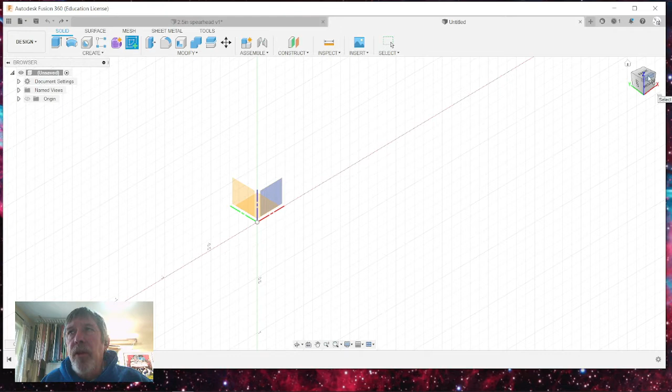So we've got the X and the Y and the Z, Y being in the positive, X being in the positive. Normally when you first start a sketch, it asks you what plane do you want the sketch to be on, and this is the look that you get. I'm going to select this plane, and it's going to flatten it out for me.

And I want to start with a line that's a construction line. I don't want to draw just a straight line, and the difference between the two is that I can draw a line like that, and that's a regular line. I can use the L key for line, or I can select construction and draw a line like this.

So both of these lines are, one's what would be considered a solid line and one's a construction line. The construction line helps for when you're creating a profile or a design where you don't want to get any confusion about getting that selected into creating whatever it is that you're going to be doing on the machine.

I'm going to delete these two. So I do want a line, and I'm going to hit the construction tool, which I've already done, and I want to lock this into this plane right here. I want this to be on the X0, and I want it to be 2.5 inches long.

So you can just start drawing it out, and as long as you're not at an angle, it'll snap to. If you have questions about snaps or anything like that, let me know. But I don't want it at any degree, and I want it 2.5 inches long. I'm just going to type that in and hit OK.

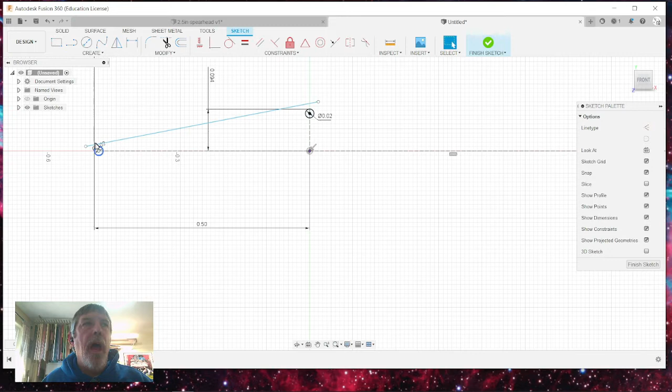So now I'm just going to create a regular line, not a spline. And I'm going to draw the line a little bit longer than what I need, and just leave it out there in space. I do want to move my dimension tool out of the way.

So now I've got this line, but I need to create a tangent, and this is your tangent tool. Since this is already fixed, I can select this and then select this line, and it brings it down so that it's matching. It's actually the exact point where it rotates on there - it's called the line of tangency. If you play a lot of pool, you'll know what I'm talking about. I'm going to hit escape so you can see what I'm talking about.

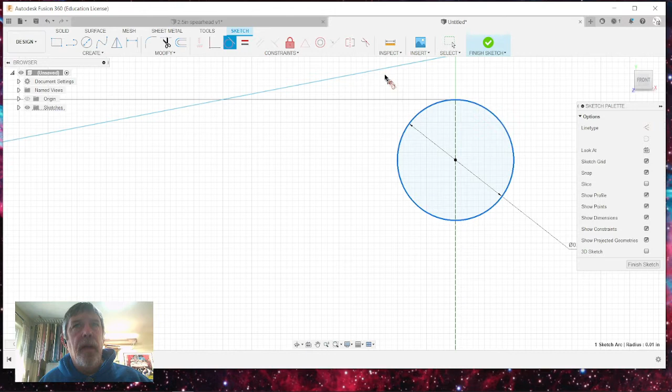Because if I grab this and rotate it, it stays tangent to that line. But I need to lock it into the tangent point of this one too. So I'm going to escape, select my tangent tool, select this line, and select this. Now I've got my two points of tangency, and this line is fixed now also.

Now I need to trim this. I want to trim this edge away, and I want to trim this edge away for right now. I'm going to leave that other edge there for just a minute. Over here, I want to trim away this edge, and this edge, and this bottom half of this, because we only need half of the profile.

I'm going to create another line that is going to be longer than this by a little ways, and I'm going to make it tangent to this edge. I'll leave my tangent tool open. I'm going to select this one and select my tangent there.

And I select my trim tool now, and this is such a small little teeny curve, but it does make a difference. I mean, you could make this sharp, but as far as doing machining goes, I like accuracy. I'm going to trim off - this dimension here is all that there is for that.

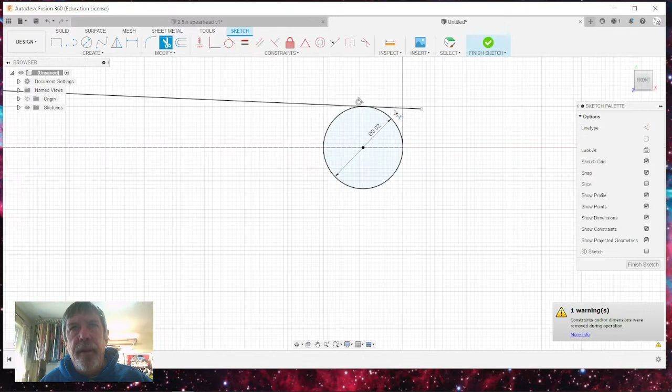I'm going to trim off this edge, so it doesn't show up in anything once we get this done. And over here I'm going to do the trimming of this end and this side and this half. So now I have my half of my profile to make my spearhead look exactly like this one.

I'm going to go back to this, and now I'm going to use the mirror tool again. Now, I suggest, and it's just my suggestion, you can do whatever you want, but there's multiple ways of selecting things when you're using tools in any CAD program. So whether you're using BobCAD or Mastercam or SolidWorks or Fusion 360 or even VCarve Pro or anything like that, there's usually a couple different ways.

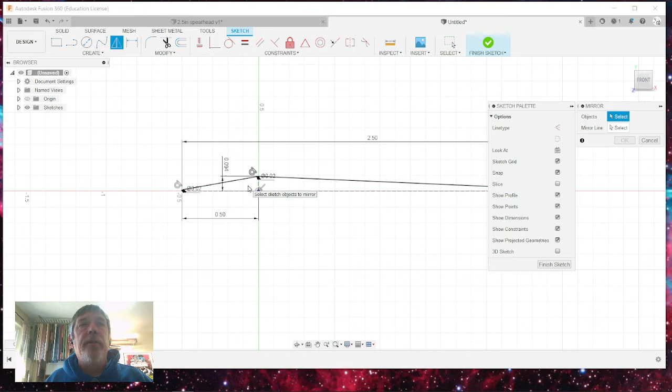One of the rules is that if you click somewhere and draw a box and drag it through the area, it will only include what's inside the box. Notice that it didn't select this line or this line. It only selected that little teeny curve right there. That's all it selected, was that little teeny curve.

The other way - I'm going to unselect that, escape - is that if you draw a box from right to left and drag this down, this is what's called an inclusive box, and it's everything that it's touching. So it grabbed this line and that little curve, but it also grabbed this line, and you don't want that line. So in this case, it's a lot easier if you do the third method and just select all of the lines that you want to use.

And you do this by holding the Shift key down. We're going to go back to the mirror tool and select mirror, and it says, what are the objects you want to create a mirror of? I want this one. I want this one.

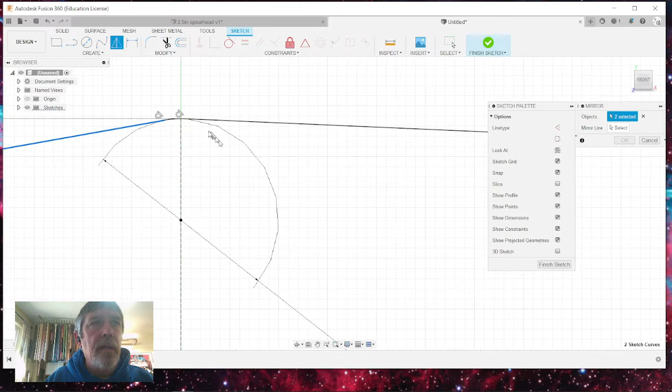I want this little teeny one right here. Make sure you select everything. I'm just using my mouse wheel to roll in and out of this. And I want this one.

Now I want to mirror them on this line right here. So select your mirror line option and then select the line, and it creates the mirror. Click OK. So now I've got a solid image.

In Fusion 360, if you've made a mistake in your drawing and when you mirror something, they're not exact. If you don't get this shadowing when you hover over it, or it doesn't look like it's two-tone like it does now, it's just light blue versus this white, then there's an open vector here. You've got a mistake somewhere in what you've created.

So you want to make sure that you're precise with that. So now I've created that center spearhead. But I need a rectangular box around it because I want to be able to create the inlay and create the pocket. So let's go back to this.

The easiest way to create a box around here that's nice and simple is you can do it different ways. You can draw a box like this. You can just grab somewhere and make the box bigger, and hit enter. The problem with this is that this box is mobile, it can be moved around and shifted in size.

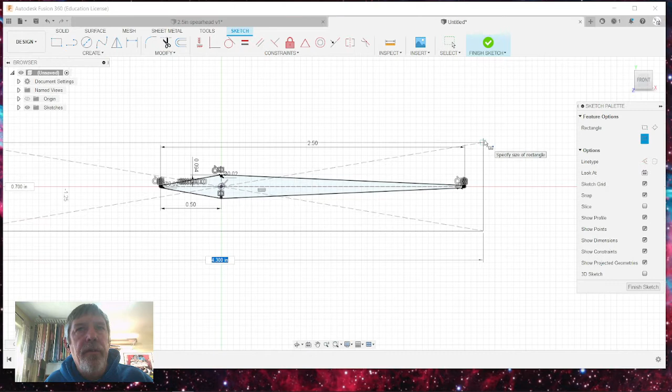Under the create menu, if you go to rectangle, there's a center rectangle tool, and I can simply click on the very center of this and draw this out, however big, and hit escape, and then put in my two dimensions. I can dimension this...

And I can dimension this. And now I've got this here. Problem with this way of doing it is that my little inlay is way off of the middle, and I don't like doing that. So I'm going to escape, I don't want to do that. Delete that, and delete that.

Here's another way of doing this. I'm going to lock onto the center line. I'm going to draw it up high enough so that it's past where I need it. I'm going to click, draw over, and draw it down.

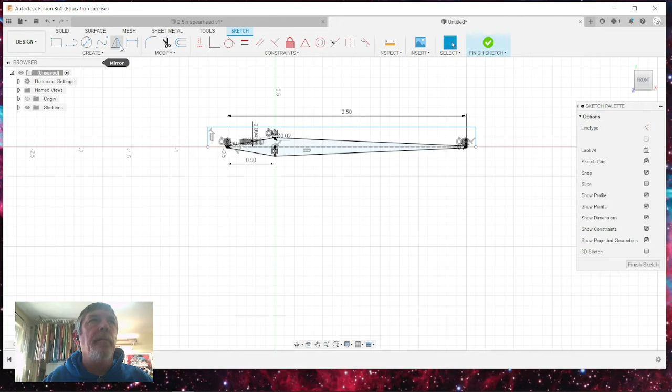I'll lock onto this line. And now I've created half of a box. And I can mirror that, using my mirror line.

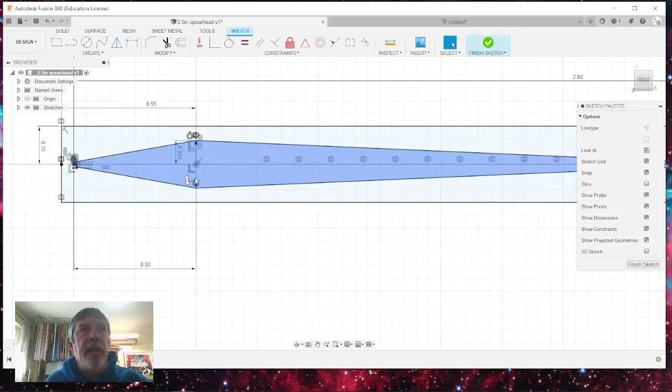So ways of skinning cats, whichever way you want to do it, doesn't really matter. So I've got my box, and though it's not exactly the same size as this one on the outside, it doesn't matter as long as the inside box is.

So now that I've got that, I need to create my solids. And when you're machining, the inlay needs to be a couple thousandths of an inch smaller, and there's a couple ways of doing this too. I'm going to show you the way that I like to do it.

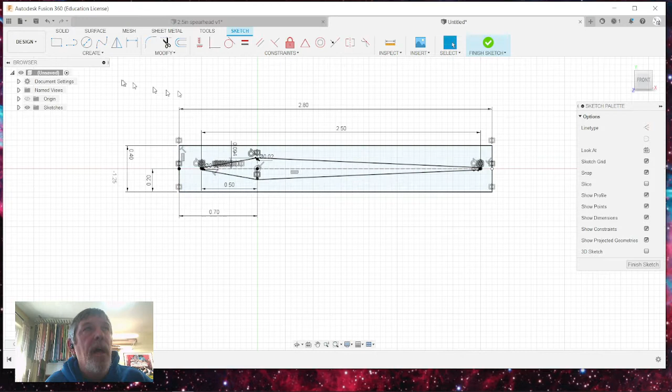I'm going to create a solid and select extrude, and this is a new body, and I'm just going to select this outer one. Because my origin, this is the flat plane, the 0 and the Z, I actually want to go down, and the thickness of the material that I'm cutting is 0.065, and so that's the maximum that I want to go with the depth of my extrusion. I don't want my pocket going any deeper than the material.

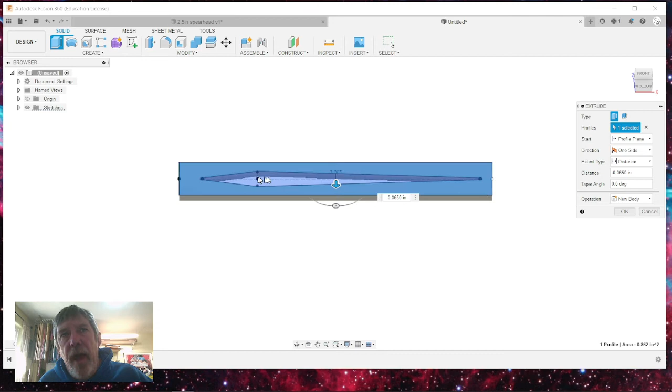And even though the curve of the radius of the cue itself will allow me to go to the outside edge, this is absolutely the deepest point of the cue, and I don't want it going any deeper than that. Glue notwithstanding or anything like that, I don't need the material going in any deeper. I don't want to take any more off the cue than I have to. So I've got it as a minus 0.065, and you can hit enter or click OK.

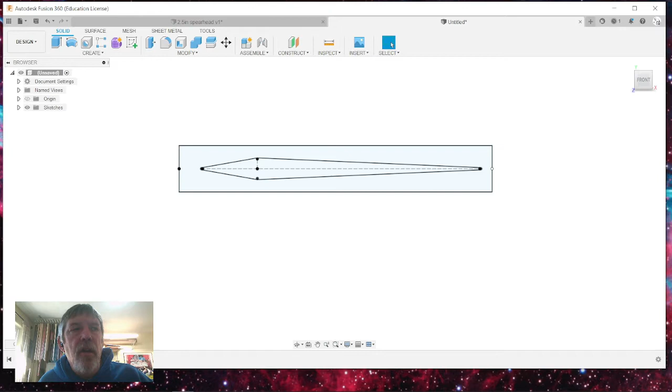Notice that I don't see my sketch anymore, because it's thinking, oh, you're all done with your sketch. Well, the sketch is down here, and this is the tool, and I can actually move this back so I don't mess with that. And the sketch, I need to go back and edit it. So right click on it and select Edit Sketch, and now I need to create another solid body, and I'm going to select this one.

And when I do, I selected the body, but I didn't create what I wanted. It's going to be called a new body too. You can do cuts or whatever. If you select on this, it'll tell you to join them, but I don't want them to join. I just want a new body. And this one also needs to be 0.065. And I'm going to go the same direction. Backspace 0.065 and hit enter.

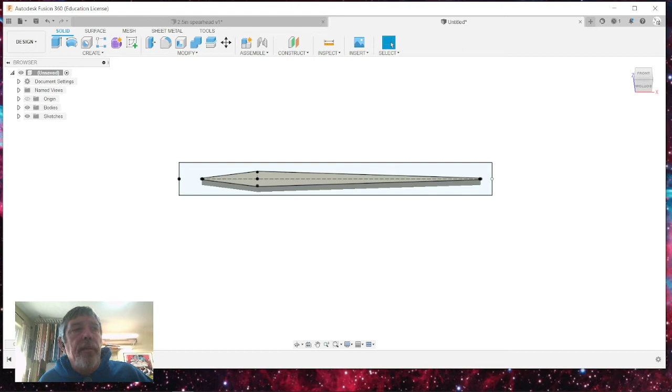And notice that it doesn't show the other body. I'm going to grab this and move it back over here. And so now I've got my two bodies. They are exactly the same size. And the only problem with this is that because there's always flex in bits, if I cut out this inlay and cut out this pocket, the inlay is going to be too tight. It's not going to fit in there. You have to try to pound it down in, and even though it might look like it's perfect, it is a little too difficult to do.

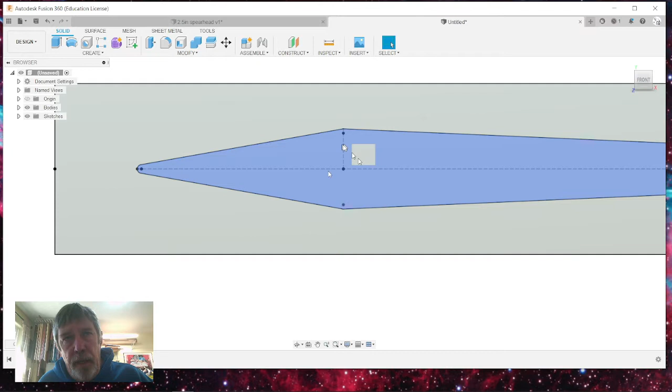And you have to decide according to the accuracy of your CNC machine and the bits that you're using and the speed you're running them at, how much offset you want to give on your space. Remember, there's just a slight little curve right there. It's just really small, but it is there and it shows up. So once you've done this, I need to make a decision. Do I want my inlay to be a little bit smaller, or do I want my pocket to be a little bit larger?

Since I'm using a bit that is 0.01975, I can actually know that the bit will fit down in these 0.02 radius corners without any issues. When it goes to machine them, it's not going to not fit there. So I'm okay with the pocket being the size that I have it. And so now I want to make my inlay a little bit smaller. And this is how you do this.

I'm going to go over to bodies, and I've created two bodies. The first body, body 1, is this one. Or no, the first body was this one, and I want to hide it. So I'm just going to click off on the eye, and I've got that hidden. And notice I can see my sketch, and I don't really want to see the sketch because I'm afraid that I'm going to select it when I go to select things. So I'm going to click the eye off and hide the sketch. And so now I've got my body.

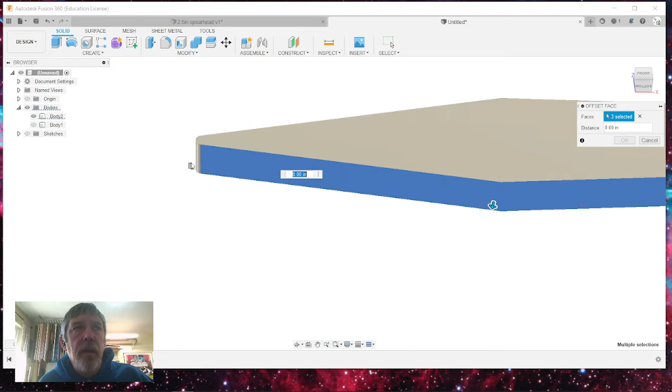And up here, I can modify this by going offset face. And you can select whatever faces you want, but I want to select all these little edges. And I want to make sure there's that little curve there, that I select that one and that one. And this one. And this one. And then I'm going to turn it around so that I can see these faces. And I need to select that one, and that one last little face.

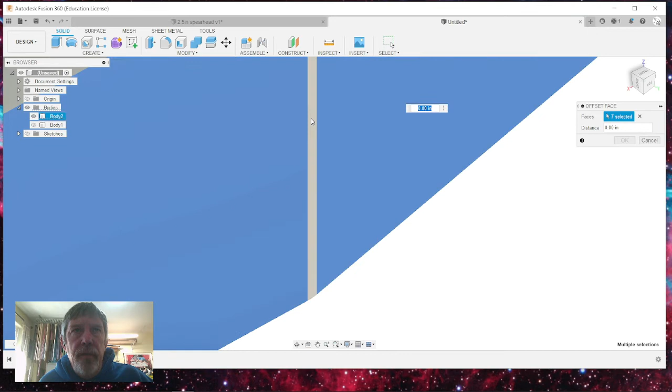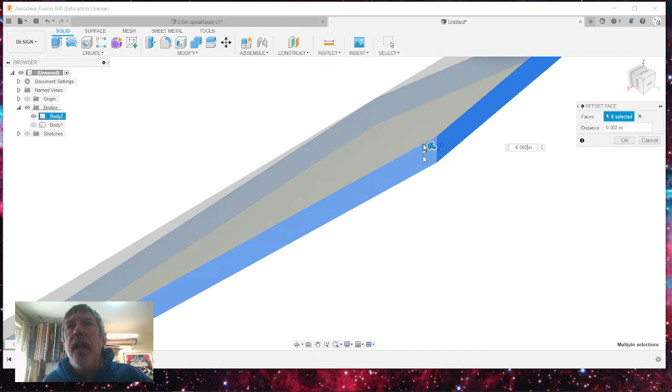And the arrow tells you which direction it's going. In this case, I'm just going to type in the minus sign, and I'm just going to reduce it by 0.002 of an inch. This made my inlay just 0.002 of an inch smaller. And I'm going to click OK. And we're going to check this to see the difference between these two. So let's turn this back around.

And turn my other body back on and see the difference. 0.002 of an inch. We can check that by going to inspect, and if I select this radius, it's going to tell me my radius is, or the diameter is 0.02, my radius is 0.01. I can select out of this thing and select this other radius, and it's going to tell me that the radius is 0.008, 0.002 of an inch smaller.

This might seem like a huge gap, and like I said, it's according to what your machine does and everything, but it's really not. When we're looking at 2.5 inches, so if you zoom way out of this, I'm still not anywhere down to where 2.5 inches is. It's almost negligible. You can't see it, but it does give you room to get your inlay to fit into your cue or your pocket or whatever you're creating. So I've got those two, and I'm going to close this now, and we're ready to create either the pocket or the inlay.

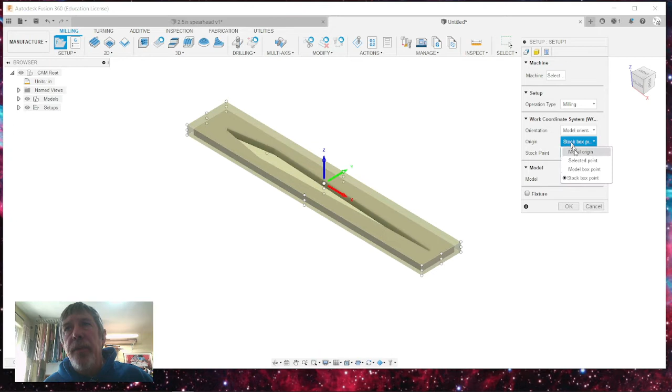Remember I said it didn't matter which plane you are on. This is my origin right here, and I can simply select model origin and it will be right there. That's where it's going to call 0, 0 when you create this point. You can select somewhere else if you want. Selected point, you can do the ends, you can do the corners, you can do the bottom corners, you can select wherever you want, and this is one of the things I was saying, it doesn't matter.

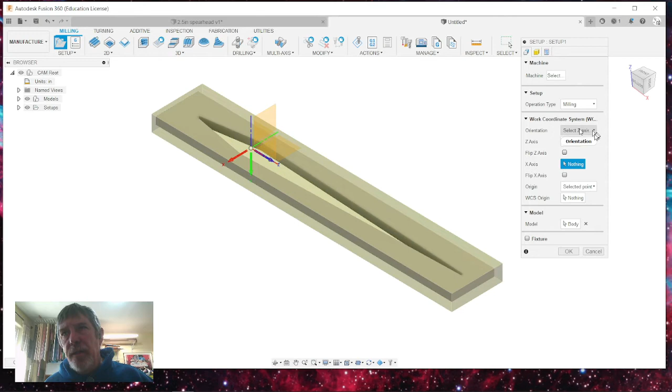That being said, you can also change where the Z is and which direction the Z is. So if say I want this to be Z, notice that now this is Z along this point. If you made your part on the wrong plane, you can change your work coordinate system in this area. I don't need to do that. I want to close this and go back to my model orientation, and I want to select my model origin.

Now this is saying that I've got stock material that defaults to 4/100 of an inch over on the side and 4/100 of an inch over on the top. This is if you're roughing materials, it's thinking that maybe you need to flatten the face out before you create the pocket, or you have a jig holding the material or something like that. In this case, it's on the cue, and the cue is mounted in the lathe on the CNC machine, and it doesn't need to be held by a jig or anything like that.

And I don't need any extra stock, so I'm going to put in 0 here. You can either highlight the number or highlight the whole thing and hit 0, it doesn't really matter. It's just going to take that extra stock away. And now you want to give it a name. We're going to call this a 2.5 inch by 0.1875 inch straight spearhead. And this is the pocket, so we're going to go pocket.

We're going to be doing 2 different operations to create this pocket. So I'm going to go pocket, step 1. And I'm going to be using that 0.0197 in mill. So I want to put this in here, 0.02 in mill.

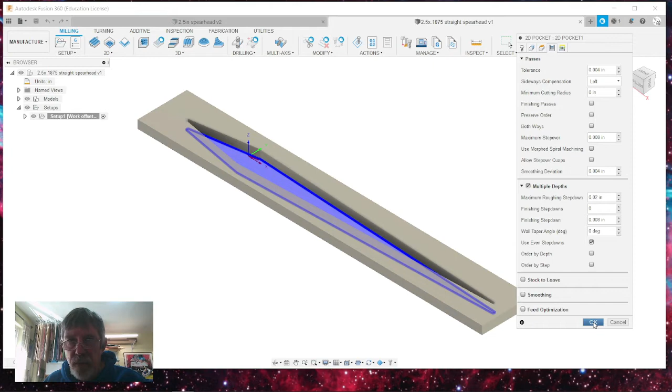This is why I suggest learning how to use two tools to do a pocket like this. So I'm going to click OK, and it's going to create all of your pockets. Notice that there's a helix here because it's going to helix down in. We're going to talk about that in a minute when we change this, but for right now, it doesn't matter. If I open up the simulation, you can create the pocket this way if you just want to let the machine sit there and run.

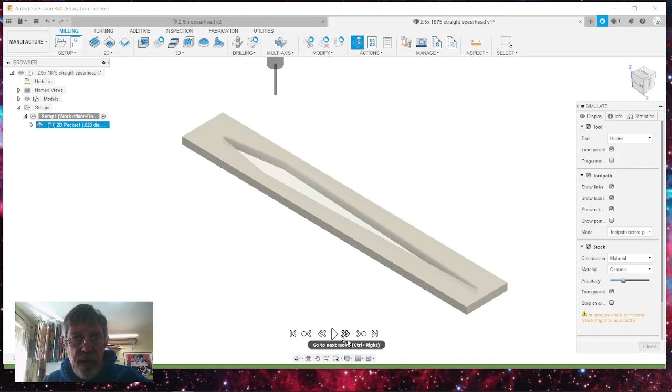I've got this running at full speed right now. I'm going to hit play, and let's slow that down a little bit more. I'm going to do it again. It's going to do a pocket all the way the full distance, one pass. Then it's going to go down and do the second one and the third one. Since it's stepping down 0.02, it's got to do at least 4, almost 5 step downs for the 0.065 depth in doing the pocket.

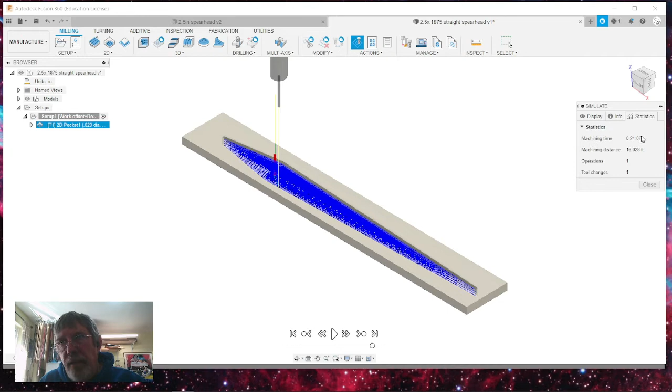When it all gets done, I'm just going to fast forward to the end of this, you can go to statistics and it shows this takes 24 minutes to cut. If you want to sit there and let your machine run for almost a half an hour, there's nothing wrong with that. It'll give you a clean cut. I do recommend a finish cut, but there's a much easier and much faster way to do this.

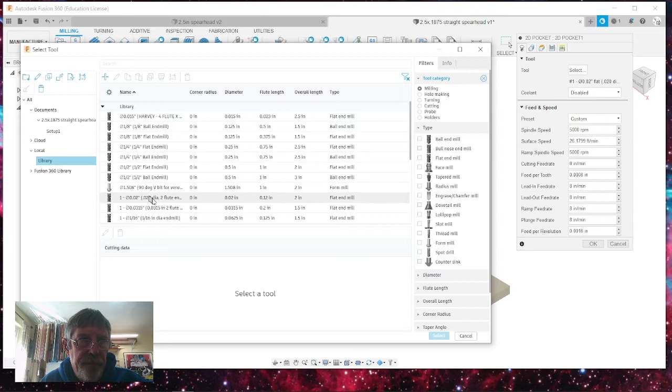So I'm going to close this, and I'm going to edit this pocket and change the tool to a 32nd of an inch end mill, 0.0315. Go to my library, select that one. This is not quite twice the diameter of the tool, but I can do a couple things here. I can change the passes. Notice that it's at 6.

Your cutting feed rate can be 8 on this. Different tools, as I've created them, I've done different things. The ramp can be 8 also, and the plunge can be 8, because we're plunging into wood, this isn't huge. Unless you're using a spindle motor, you don't have to worry about spindle speed. That's just an extra M code added to the G code, and it isn't necessary. So we've selected our tool and the geometry, and in passes, in this case, you can step down 0.04.

It's a little over the maximum amount of recommended step down, but you are doing wood and you're using a solid carbide bit, so I'm going to go 0.04. And my maximum step over can actually be, if I went half of 0.03 would be 0.015, and I'm fine with that too. So we're going to just stay, it's a little under a half, it's about 48% of the diameter of the bit. And under linking, down in this last one, we've got a Helix Entrance.

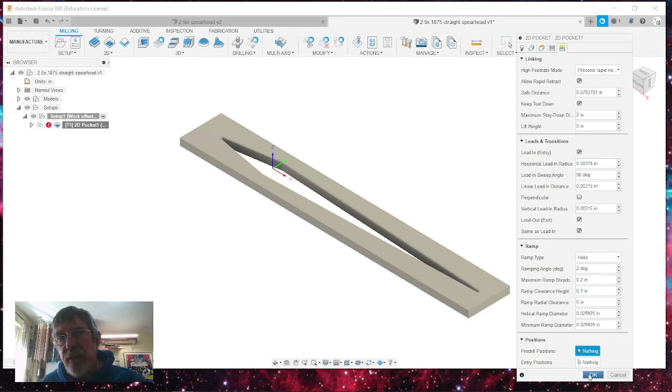I'm going to leave this and show you what happens with that ramp and some of the time that's wasted on that. So it doesn't matter about entry positions. It can just enter wherever. It's going to probably enter right in the middle. And we're going to click OK. So now we've got this, and haven't changed anything as far as the helix goes. We're going to hit play, and we're going to look at the statistics.

And we've cut the time down for cutting this whole pocket out down to 5 minutes. The problem that we have is that right here you can see it doesn't cut this end edge. Okay. So we're going to fix that. Let's do this first. This is the helix coming in. The material's 0.065, a little over 1/16 of an inch. It's coming down and spinning, thinking it's going through some material, and you don't want to break your bit. We spend good money on these bits, but you can cut this distance in half or more.

So since it's at a 0.1, right click on your pocket, edit, go to your linking, and down here under ramp clearance height, I'm going to change this to 0.025. This is a little over a 1/32, but as long as you start with good clearance, you're okay. So we've cut some time there. Did it save us any time? Let's find out. Statistics. Not quite a minute, it took about 35 seconds off of the time. So it's a little bit of time saving, but it is 35 seconds saved in your life.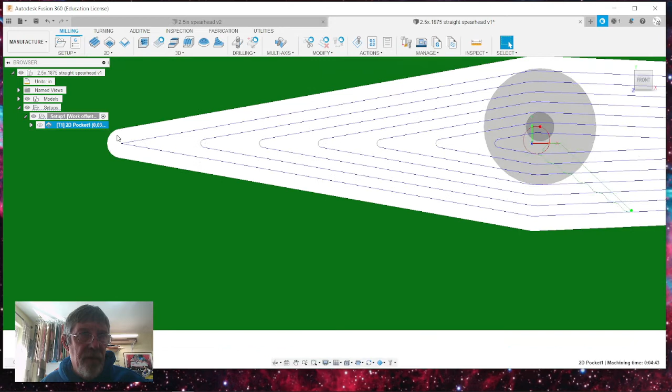And again, this bit doesn't fit down into the corner of that pocket. You can see where the actual pocket is. So we're missing material here, even though it cuts on this side. So let's go back and figure out what to do so that we can actually cut the whole pocket. And this is a good way of doing pockets. We need to create a different setup. Since I don't have a tool changer on my CNC machine, if you do, you can probably do it all in one, but I do need to create another setup.

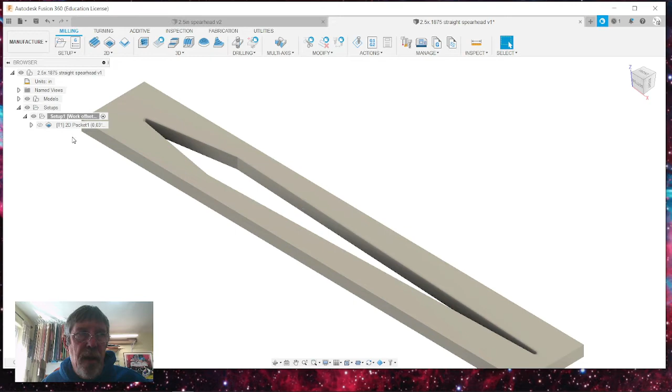So I'm going to do setup, new setup. It's going to default to the original, and we're just going to do model origin. The stock material is the same, from the preceding setup. And we're going to call this the 2.5 inch by 0.1875 straight spearhead pocket outline. Step 1.

Might seem redundant or too long. You can certainly come up with whatever way you want to name them. But when I do this stuff, I have so many pockets and inlays, I need to be able to recognize it from just looking at the title on this G code. And this one is going to be using the 0.02 end mill. I'm going to click OK. So I've got my second setup here. This one's going to be a 2D contour.

And the tool that I'm going to use is my 0.02. That's this one. Select. It did go back to all of its original settings, and I don't need it to be going that fast, so I really want it to cut at about 8 inches per minute, which doesn't seem like a lot until you actually are doing such a small cut as these, and 8 inches is moving pretty darn quick. And disabled, and we're going to select the geometry.

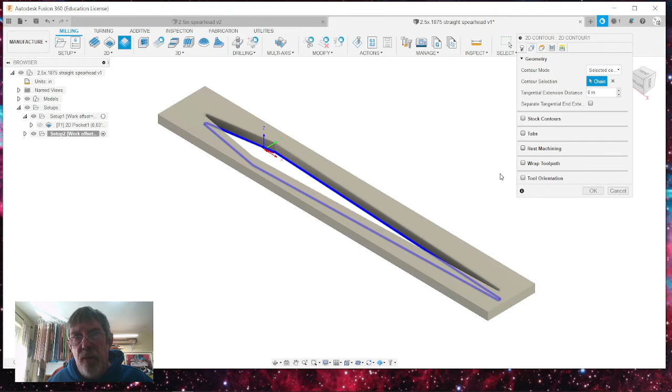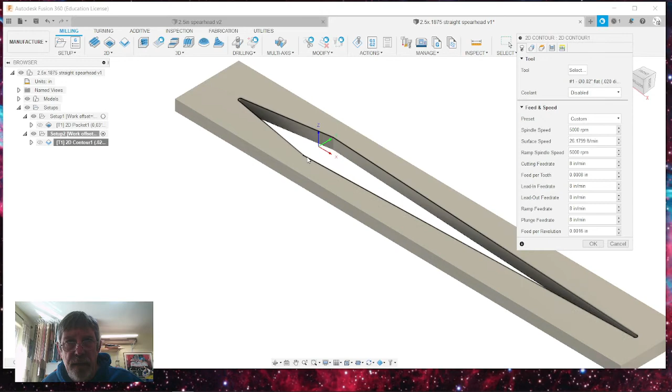And so if I did this as just one, it would just come down somewhere like here, and you can see where it has this lead in and lead out. One cut all the way around. Again, it'll break the bit, especially because we're using such a small bit. So go back into edit, and I don't want it to crash into that. I would rather have it ramp. So when we go to passes, I want to do multiple depths of 0.02.

So it's going to go down the depth of the radius or the diameter of the bit, make a pass, and then go down to the next depth. And under linking, I'm actually going to do a ramp. I'm going to turn off my lead in and lead out so that it just ramps down through the material. And if I left this at 2 degrees, it would come out, and here's my ramp step down maximum. I'm going to put in a 0 right there.

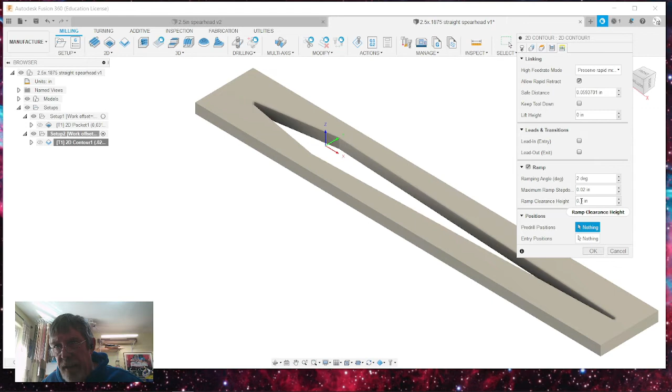Ramp clearance height again is 0.1. I'm going to click OK so you can see what's going on here. Again, it's going to sit there and do like 6 or 7 passes. 1, 2, 3, 4, 5, 6 before it even cuts into the material. Totally unnecessary. I'm going to edit that and go back to my linking and change my ramp stepdown to 0.025. And click OK. Now it's only going to go about 1.5 rotations around this before it actually starts cutting in.

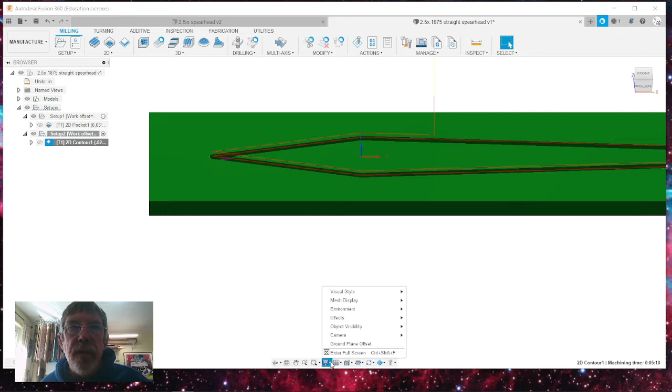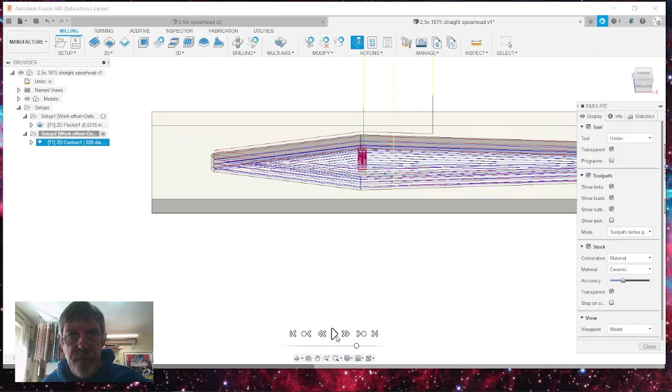And in Fusion 360, you can change the way that this looks simply by going down to your visual style. There's my visual style, grid, visual style, and keep it as wireframe. And now when I select that, and I select simulate, slow this down, play it again. Oh, it's on the first pocket. Sorry. Let's stop that. I'm going to do this one. Close. Let this one, simulate, and let's see what happens.

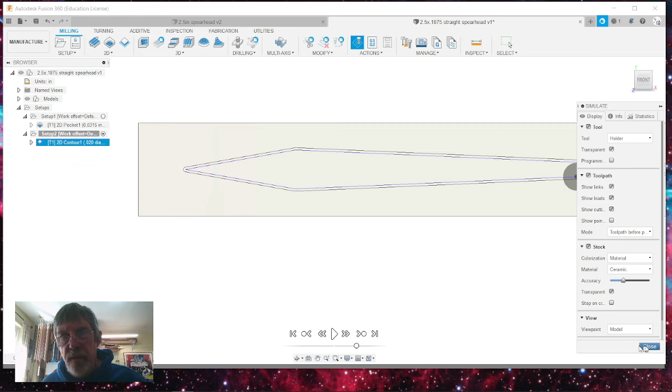So now we've got your first pass doing this outline, and the second pass, this one, should highlight. Close. Here's your 2 passes overlapping so that you can see what's going on. The first one's going to do the outline, and it'll actually make that whole cut and go all the way down there into the corner the way that it's supposed to in the material.

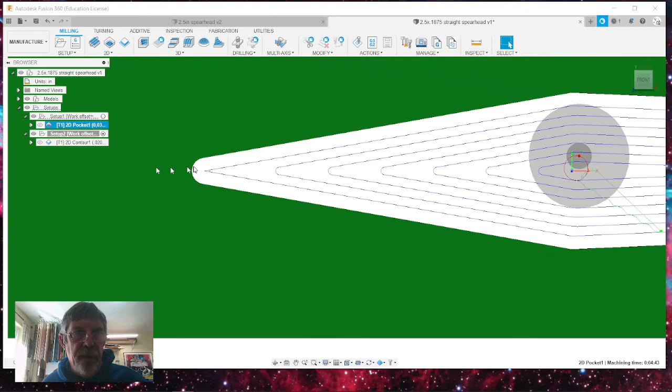Now, because you have some flex in bits and stuff, since you did the outline and you actually run this pass first, when this full pocket gets cut, it'll actually not touch that wall. Say you wanted to leave yourself a little bit of room. I'm going to right click, edit this, and under passes, if you go to stock to leave and you add in a value here for radial, which is the side, and axial is the bottom, we don't want to leave anything on the bottom, and we go OK, it's going to leave a little bit of a wall right there.

So now we've got our 2 passes. This first one takes a little under 5 minutes, about 4 3/4 minutes to run. So you can pocket it out. And this contour one is going to take just a little bit longer because you are running a lot of ramping. We're going to select that one. I'm going to look at statistics, and it's 5.5 minutes for that.

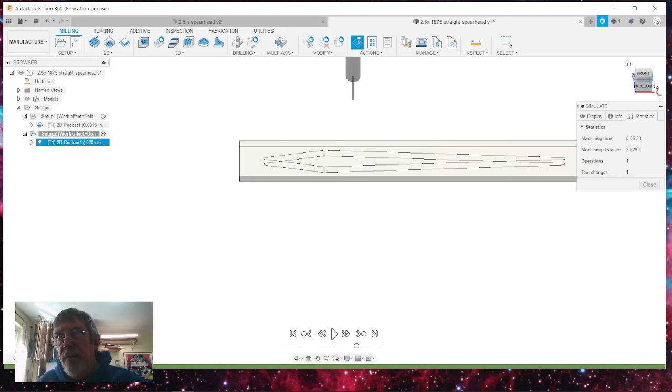So we've taken the pocket that you can do with 1 bit from 24 minutes down to about 10 minutes total, 10.5, maybe 11 minutes total. You got tool change time in there too, and pulling up the other program, but it certainly works a lot better. So now that I've created this pocket, let's do the inlay. I'm going to save this as a different version. And we're going to do another setup. Actually, I'm just going to go ahead and leave this here. I might edit this out.

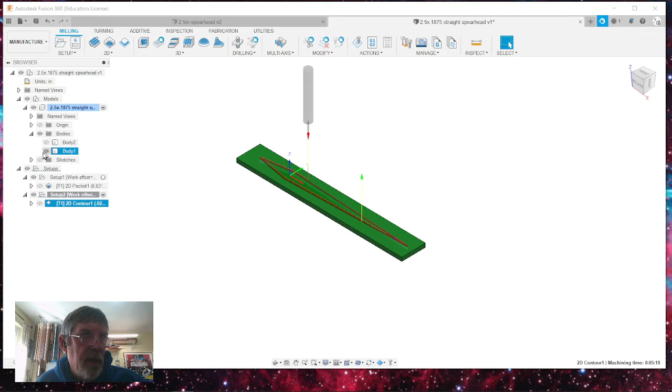I want to go to models and go to bodies and shut this body off and turn this body on. So now I've got my inlay. This one's much easier, much more simple to set up and do. But I do need to do a new work offset, a new setup. So I'm going to go up to setup and select new setup. And I want to again use my origin. On this one, because it's an inlay, it doesn't really matter where you select for this, but I definitely don't want my stock being oversized. So it uses it from the original. But I do want to use my model origin.

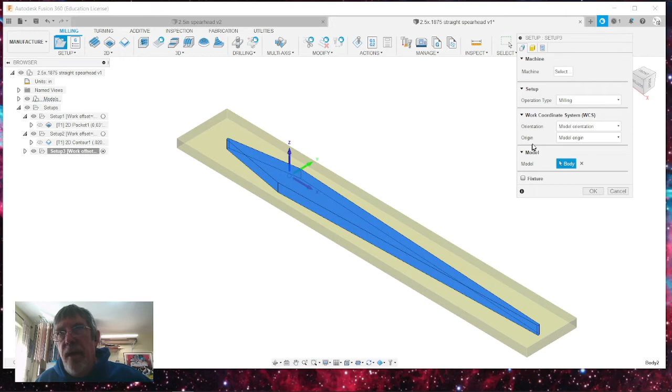This will just help me, because I'm going to be doing 4 of these and I want to cut them back to back. I want to be able to do one and then move over the distance that I need to and cut the other one and do the distance and cut the other one, turn it around and try to save material. And we'll talk about that later. So I've got this set up and we're going to call this 2.5 inch by 0.1875 inch straight spearhead inlay.

On this one, you can use the 32nd of an inch bit, because I'm going to be using it in paua shell abalone is what it's going to be cutting out. I want it to be cutting fairly slow, but I don't need to waste a lot of material. While a 1/16 of an inch doesn't seem like a lot, it ends up being a fair amount. So we're just going to go with 0.0315 end mill and click OK.

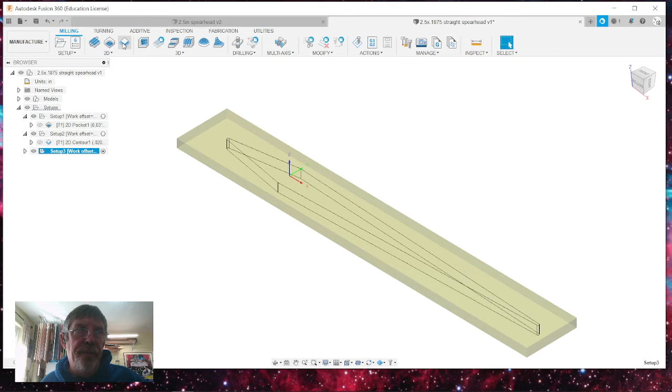This is a contour, and I need to change the tool to my 0.0315. Select OK. Turn off my thing. I'm going to leave the speed at about 6. I want this cutting fairly smoothly, but my lead in and lead out certainly doesn't need to be that slow. Plunge, feed rate 2, good ramp, all that stuff is good. Doesn't matter about any of that.

The geometry is just this bottom edge. The retract height and clearance heights doesn't really matter on this. Don't need to change those. We're going to go to passes now, and it's got this one pass, and same thing. I want to do multiple depths. I don't want it cutting all in one pass. Now you can do different things.

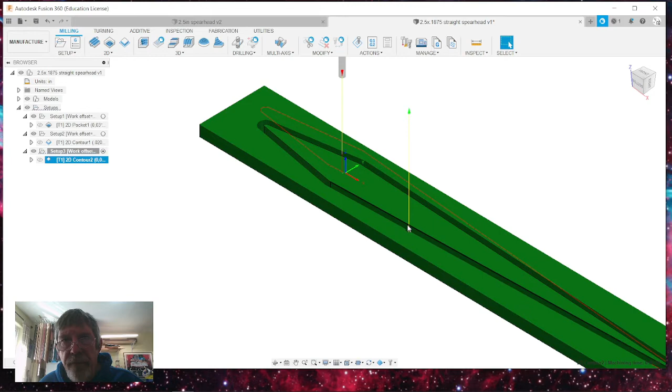One, if I just chose ramp and I left this at 2 degrees and I clicked OK, it would come down and ramp in, and notice that right here it has this exit because I didn't turn off the lead in and lead outs. Let's get this straight so we can see what's going on here. When it comes down and cuts, it's just going to do that one ramp, and it's not going to take very long to cut it, and that's too much on that bit. And also when it exits, it moves off to the side and it's going to crash.

I don't care that it's just a 1/16 of an inch thick abalone shell. It's still harsh enough on this turn and come out that when it hits this wall, it's probably going to break your bit. So, and there's also the lead in here too, and I don't want any of that.

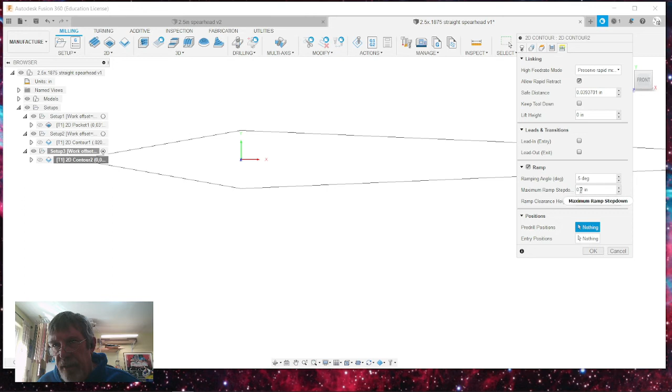So let's edit this. Go back to my linking. I'm going to turn off my lead in and lead out. And I'm going to change the degree from 5 to 0.5, a half of a degree. And my ramp clearance height, I'm going to change that again. I'm going to go 0.05, a little less than a 1/16 of an inch. And right now it's got the maximum step down of 0.02, so it's going to do that on each step.

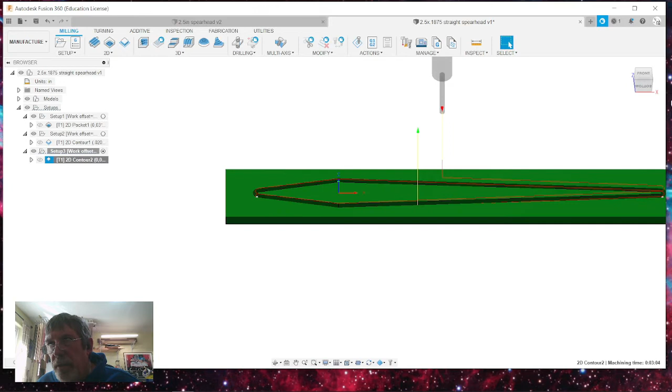And now we've got, it goes down 0.02 on each one. And this might be a little bit much. Abalone, because it's all pressed and glued together and everything, you don't really want it diving through. On that steep, you can see the distance from here to here, it's about half of the thickness of that. This is still too steep, so I'm going to go back in and edit it again.

It's one of the things I love about Fusion 360. You can always go back and just, you can see how it looks and then go back and change it. I'm going to change this to maximum ramp step down 0.03. And I'm going to go to passes, and I'm going to do multiple depths of 0.04. I'm going to leave that from the last time we used this. And you can shrink these up just by hitting this. And now I'm going to click OK.

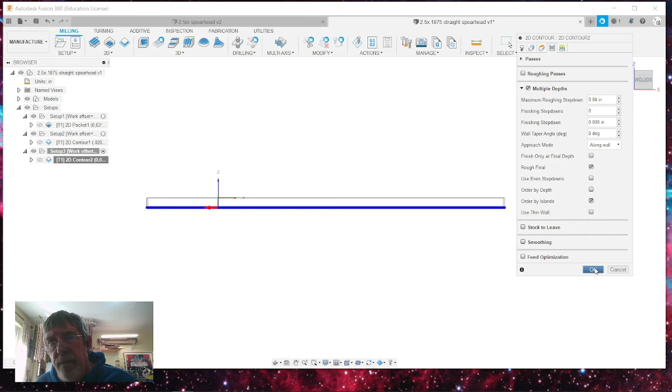Now you can see that we've got about 4 depths of paths going into that. And it still doesn't, I would still rather it take a little bit more time on this. So I'm going to come in on this. It's still cutting fairly aggressively for this size of a bit, so I want to do a little bit more. Let's go back and change it one more time.

I'm going to change the ramp to 1/4 of a degree. That should double the amount of loops that it takes. There we go. I'm much happier with this. This doesn't put too much torque on the bit. Notice, let me click out on this.

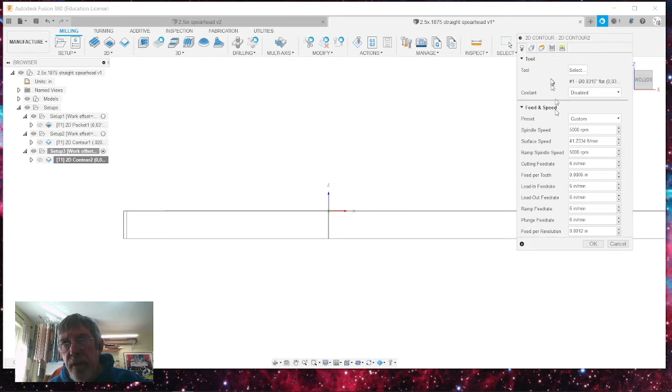Notice that you've got the 2 blue lines. Since the total depth is 0.065, it steps down 0.04 on the first step, and then it goes around once flat on that, and it steps down the final bit and goes there. I'm going to change that. I want to add in another step down, so we're going to change this step down to 0.02. Backspace. Yeah, if we do 0.02, if we go 0.022, it should be 3 passes. Delete that. And click OK.

There we go. So now we've got it where it cuts down in 3 passes. And let's take a look at the machining time for this. I think that it's going to take about 6 minutes. It should take about the same amount of time as the outline for your pocket did.

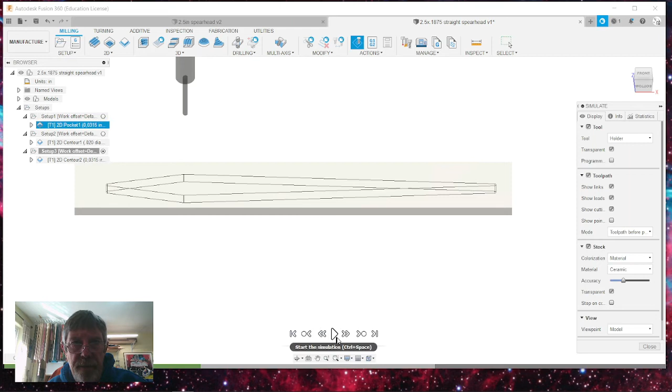Oops. Sorry. This is the one that I want to do. Geometry.

There's a little bit of changing your location or doing multiple cuts. You could make this faster by making multiple copies of this particular inlay and setting it up so it cuts one, then another, then another. We'll cover that in another tutorial at some other time.

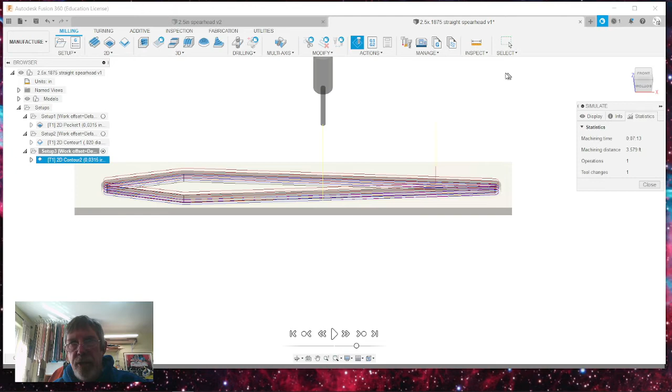I wanted to make sure you understood how these go. Now that we've done the tool pathing for these two, we haven't created the G code for those. So I'm going to make this my active one, go up to the post processor, and click on it. It's going to give me what it is. Step 1 is the straight pocket, step 1 is the outline.

It's got the wrong size end mill in here. Remember, I changed this—this is the pocket. Let me cancel this and double check. I'll edit this. It's listed as step 1 here, but it's actually step 2. Let me change that to step 2 and click OK. I want to make sure that's the whole pocket.

Then I'm going to double check on this one, make sure this is active. Right click, edit this, check my names. This has got the right one—straight pocket spearhead step 1. Okay, for some reason I had called the other one wrong. Good way to just double check on those.

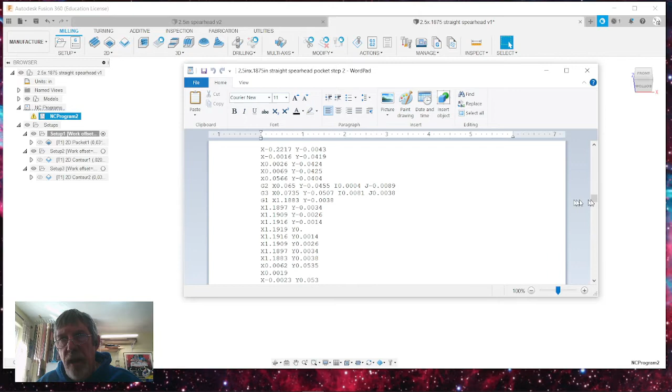I've already saved it, I'm just going to close this. I know a lot of times people say that traditional milling is more complex or harder, but in reality, while creating a G code with something like Fusion 360 or VCarve Pro saves a lot of steps in its simplicity, there's also a lot of complexity you need to make sure you know and understand.

I would challenge anybody to say that making a cue traditionally, not using anything like a CNC machine, builds you a better cue. I don't believe that. I think you can actually be more accurate and have more intricate designs, patterns, and inlays, giving you much more of an aesthetic look and uniqueness, especially when doing one-of-a-kind custom cues.

Most of the cues that I design for people are one-of-a-kind—I don't make the same cue for anybody else, and that's what people are paying for. Being able to learn this gives you the ability to completely design something that's very unique to that one particular cue.

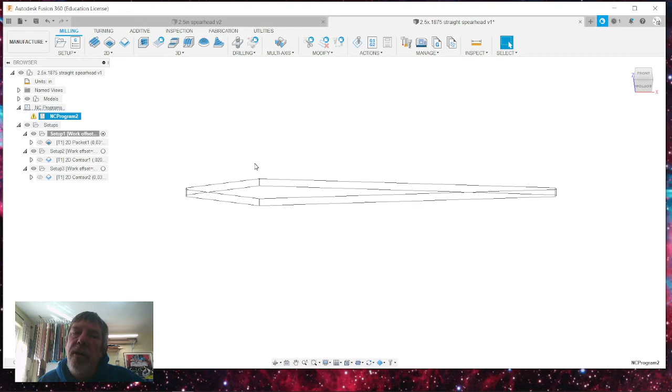If you want to use the spearhead for multiple cues, there's nothing wrong with that. I have done cues where I've used similar inlays or patterns because the person said they liked that little diamond, and that it would work really good in it, while the rest of the cue has some uniqueness.

So I just don't do a whole cue that looks exactly the same. We've posted the process on that one. Now we're going to go to the second one here, this is the outline, and I'm going to post the process on this. This is step 1 because it is the outline. It says outline, clearance height, post, save. I don't need to look at the V.

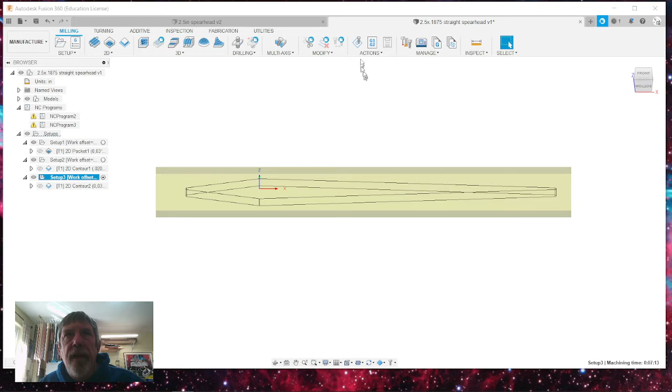And now I'm going to do my inlay. One thing I didn't talk about is that same thing when we're doing the spearhead inlay, the type of bit we're doing, and the clearance height in post.

You might have noticed that right here where these 2 NC programs are, there's a little warning. The warning in this particular case is since we didn't use stock that had extra stock, if you click on the warning, it'll tell you work offset has not been specified using G54 or work coordinate system. There's not a work offset because I don't have any extra stock that I have to be aware of that I'm using on this. But these are always good to read. They're pretty easy to find, and if there's anything wrong with the problem or the program, you'll be able to see it right here, and it'll tell you what it is.

So there's that. And now we will go cut out those pockets on the cue, and hopefully they work out right, and then the inlays. Thanks for watching, stay tuned.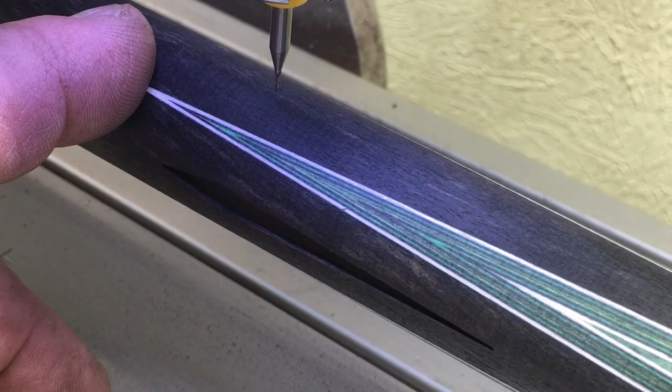I get questions sometimes about whether or not you should use a probe to find the 0 plane. It works really good if you're doing metal, but wood is non-ferrous, so it doesn't really work for that. There's also a little bit of difference because of the rotation of the head. I'm at Z0, X0, Y0, this is the center of my pocket, this long little 2.5 inch diamond inlay that I'm going to be doing.

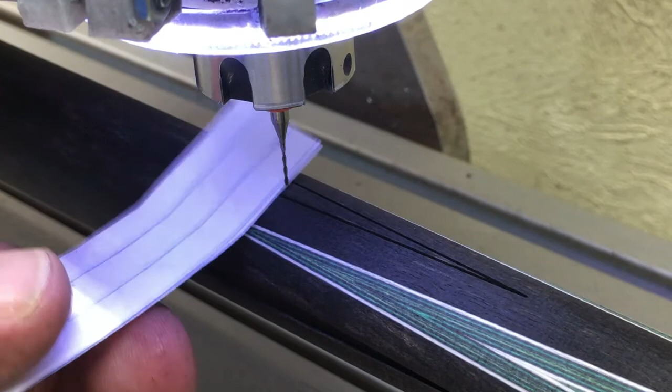And I get questions sometimes about whether or not you should use a probe to find the zero plane. It works really good if you're doing metal, but wood is non-ferrous, so it doesn't really work for that. There's also a little bit of difference because of the rotation of the head. So we're working with such small parts, the paper method works really good in my opinion.

Okay, I've started the program and it's running down through its helix cut into it. If you were cutting really hard material and you had extra stock, that's why it would be doing that. It is a little higher clearance than necessary, as I had talked about in the Fusion 360 portion of this tutorial. The pocket does a pretty nice job here.

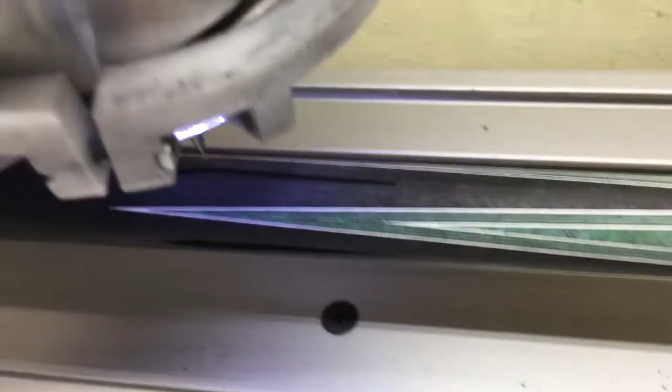Okay, we've just created that pocket. Now I need to rotate 90 degrees and do another pocket. And I want to make sure that I'm centered on the center of my point. So let's walk through this. First thing I need to do is go to MDI.

And since my angle is at 0 right now, I have already typed in the G0A90. And you can just scroll back up through that or retype it, whichever way you want to go. So I got G0A90, and when I hit enter, it'll rotate 90 degrees. Okay? But I do need to make sure that I'm in the center of my point. So I'm going to use the tab key to open up my scroll. And if you've got a MPG handle or something like that, or a joystick, that's fine.

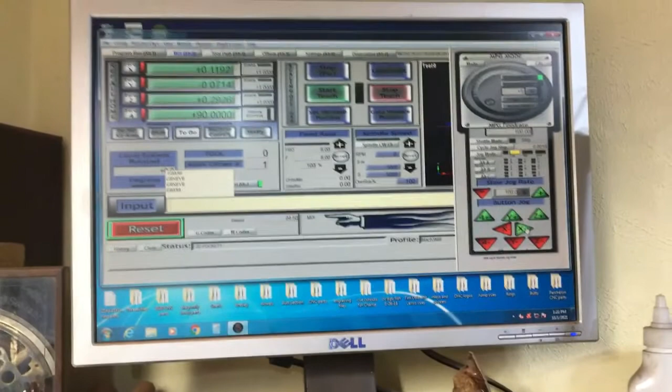This might be too much information for some of you that are already CNC and Mach 3 savvy. But for those of you that are still trying to learn, I just want to walk through this. So I've got my speed set up to 0, and I've got it in jog mode, and I've got it set up at 100%. So I do want to watch this carefully. I'm going to put it over the X and bring this down, and I'm just going to bring my head all the way up to the center of this point. A little bit further.

You can see what I'm doing here. Make sure my focus is on this. And I'm going to slow it down to 5% now. And lower the bit until it's almost touching. And I want to make sure that my Y is on 0, because notice that it's not. I'm not on center here.

And I did make the mistake of not going to G0 Y0. So I'm going to just type in G0 Y0. I don't need to go to X0 right now. And hit enter. And it moves that over. So now I can see if I'm close to being on center. It looks pretty good, but again, I want to lower my head down a little ways and see if I'm right in the center of that point.

This looks pretty darn good. Some focus right there. So I'm going to move over this. Move forward a little ways just to check this. See if I can hold this steady enough with my hand. Right up to the tip of that. Looking pretty good. I'm going to lower just a little bit more until I'm almost touching the wood.

It might be a step or two off. Just a little bit to the left. So I'm going to set my speed to 0.1 and jog mode and step over. Going the wrong way. I finished centering that and called it good and set that as my 0. It ended up being off at about 0.3 of a degree, which wasn't too bad, and just called that 0.

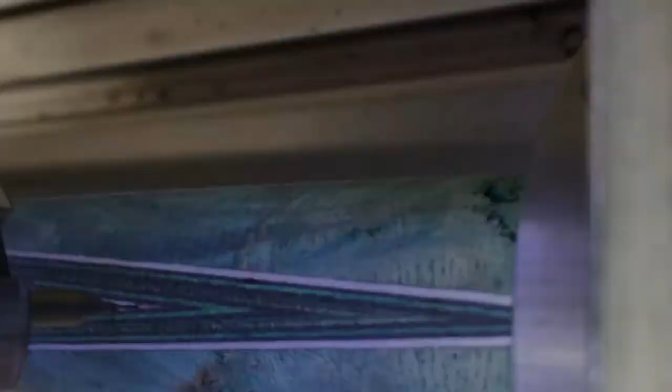Quick little video on doing inlays; we're going to cut out 4 little point inlays for that cue. And to hold this material down, there's a couple ways of doing it. You can do masking tape on both sides and then you super glue on it. You can buy this stuff, which is a double back CNC tape available on Amazon. Pretty cheap for the price. And I just need a piece that's about as long as my material. And I've already cleaned the bed of this off.

And I just use scrap cabinet shelving material you can pick up at any Menards, Ace Hardware, Home Depot or Lowe's or any of those guys. You can buy it pretty cheap. It used to have a better coating on it. Now most of the time it's melamine, so you have to get pretty good stuff. If you can find it at yard sales, I just cut these up and use them. So I've put the tape down and rubbed it down really good. Just going to peel the back of this off.

And I decide which side I want to be up and just stick it down on there. Pretty easy to do. Now I don't want... I'm going to put this piece down on here, just cover this back up. This is the 0 plane, or this is the 0.065 for the thickness of the material.

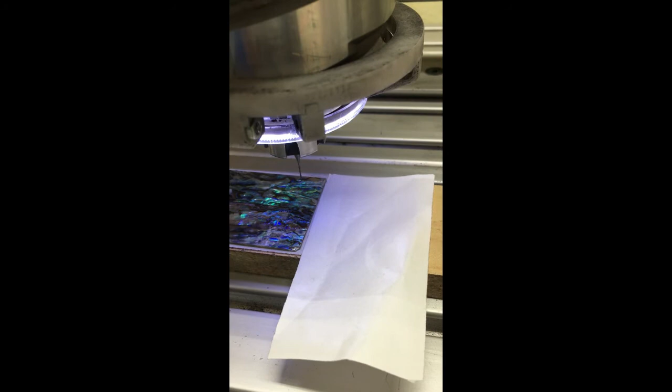So I've got my CNC head here, and I've got the bit that I'm going to be using. I do want to know where the material is going to be stopping. I don't really want to cut into the adhesive material in the back, so I'm going to get down to where I'm almost touching. I'm going to bring it over here, and we're going to do that trick with the paper. And do it on this side. Slow this down to about 10%.

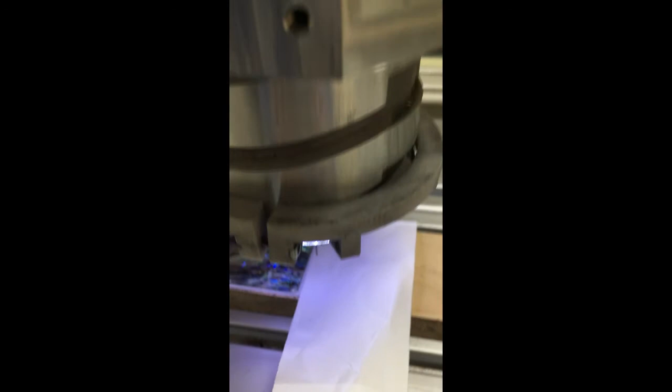It's just almost touching, and use a piece of paper with my other hand and see what's going on. Slide a piece of paper under there, slow this down a little bit more, bring it down so it just doesn't move. I'll step up a couple steps. This gives me just enough clearance, and if I call this on my Z, if I call this minus 0.065, the top of the material will be the 0 plane.

Hope you can follow along with what I'm going to talk about here. I'm trying to save as much material as I can. This abalone is pretty expensive. I'm going to slow my feed rate down to 10. I've already got my Z set. And I know that this is almost the edge of the abalone shell. And if I call that minus 0.5 on the X, that's my inlay, and I know that the center of my inlay is where I need it.

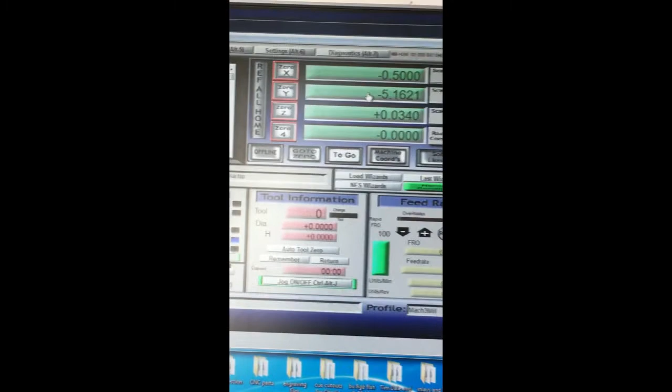I also need to know where this edge is. I do know that my inlay itself is 3/16 of an inch thick. Go down a little speed. So that I'm almost on that edge. Since 0.1875, half of 0.1875 is basically 0.1, I can call this on my Y, I can call it 0.1.

And now if I go to my MDI and type in G0, X0, Y0, and hit enter, this is going to give me this small inlay pocket right here. And now we're ready to do the cut.

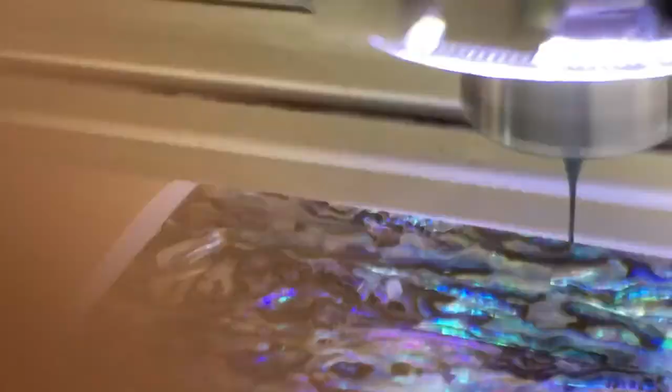I've started up the program. It's going to move rapidly over to where its entry is. And we set this up as a ramp, so it's going to ramp its way down into the material bit by bit. And it takes a little while for it to cut. It's only cutting about 6 inches a minute. I think that we said this cut was a total of 7 minutes. And so that's about how long this video is. You can fast forward through it if you like.